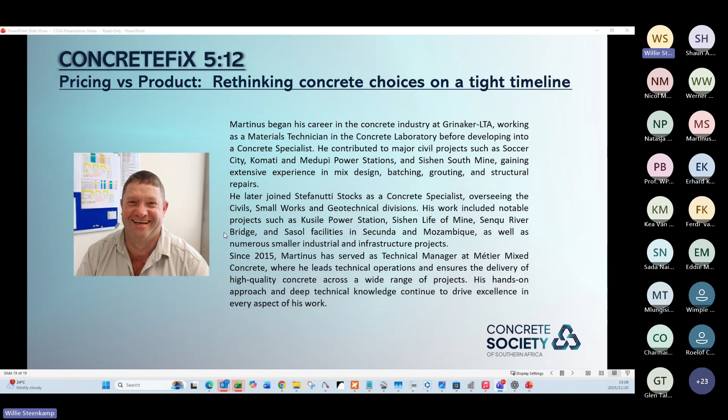Thank you very much. I'm trying to share here, so that is, yeah, okay, cool. Can everybody see that? I assume so, Natasha? Yes, I can see it on my side.

Okay, cool. So Natasha asked me to present on challenges we have in ready mix with customers or with projects, and I've thought about it hard. Where do you start to guide people in a direction without offending people? And I think the one common thing is everybody's in it for the money and we want quick turnaround. And pricing versus performance stood out as a topic that one can actually say quite a bit about, but it goes quicker than I thought.

So let's start here by saying nine out of ten times, if a project's being priced, the QS asks for pricing, and what you ask for is the cheapest because you want to win the job. Then six months to a year later, you start the project and everything goes well. After the first pour, you get a call from the project manager and he reckons, meneer, your concrete is substandard. Meneer, what do you mean? No, we can't strip our formwork. Yes, but you did ask for the cheapest concrete. The cheapest concrete is not necessarily the quickest concrete.

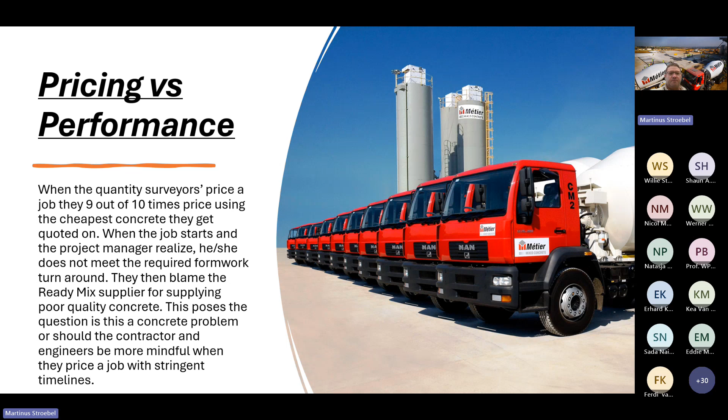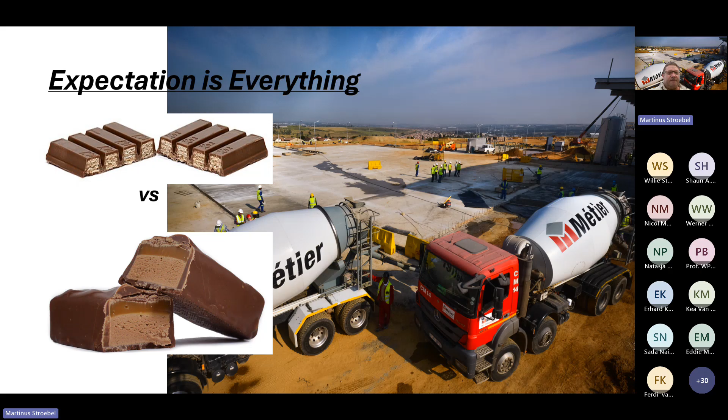And then I started running through this in my mind, and a practical application for the married people. You go out to the shops, your wife or husband asks for chocolate. You bring a specific chocolate, but the expectation was something else. They're both going to work, they're going to sit on their hips for some time, but it's both chocolate. And when you go into concrete, you ask for concrete, you're going to get concrete.

The thing with concrete is we only see the result seven days later. So then the whole argument starts. Is it bad quality? Is it good quality? Is the cement blend right? Is it not right? Yes, we priced it. That's what you asked for, contractor or customer. But we still guarantee the 28-day strength you asked for at tender stage. And like most other ready mix suppliers, everybody will stand by their product and guarantee their 28-day strength.

It's very rare that you get a request from a customer saying, listen, we need 60% of the characteristic strength to strip, this will be a quick turnaround project, and we need to turn around formwork because that's quite expensive, and we need to finish the project in six months, not 18 months like we planned initially. So your expectation is not clear. So what I'm saying is expectation is everything.

If you expect a fast setting concrete or concrete that gains strength quickly, it will be required for you to tell us as a ready mix supplier what you need. Then we can price accordingly. Otherwise, you're just going to get run-of-the-mill, I don't want to say cheap and nasty concrete, but a good quality concrete that is the most cost-effective concrete we can supply to win the job.

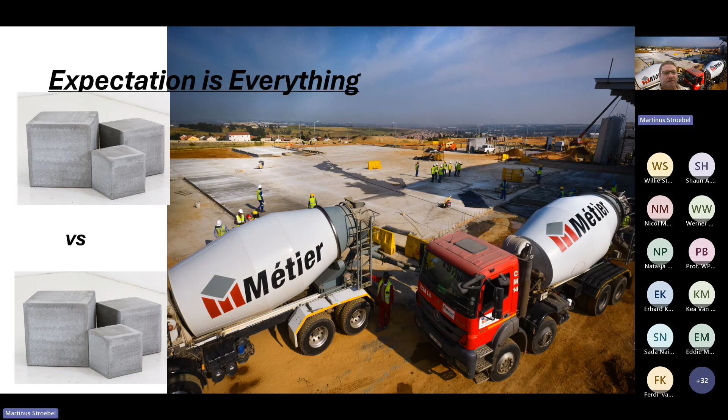When you then look at the cements that we are able to use, there are 27 families that we as a ready-mix supplier can make use of to supply concrete. And remember, every component in that cement or cement blend comes at a cost. It depends where in the country you are. If you're close to a slag source, slag might be cheaper, fly ash might be cheaper. If you're closer to a cement factory, that also plays a role in the transport.

So there are 27 types of cement that you can start off with to blend. And according to SANS 50197, there's a band. If we take the worst case scenarios, a CEM II or a CEM IV/B, you can blend up to 35% or more than that. I think it's up to 50% extender in a B mix, which then says there are around about 945 blends that any ready-mix guy or any producer can come up with. The problem with this is each of those blends will have its own strength gain characteristics, and that determines the rate that you can build at.

A CEM II/A, we can blend anything from 6 to 20%. That is typically the cement that we would get. And as a ready-mix supplier, you would extend further to produce the most cost-effective concrete on the market, which is technically sound. And with every percent of slag or fly ash or lime extender, you change the rate of gain, and it influences what is possible on site.

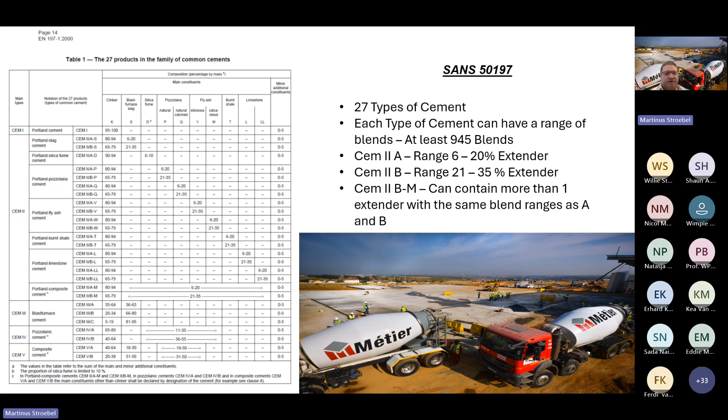The same with the Bs, you can go up to a 35% extender, and if you go into a B-M mix, you can complicate this even more because you can add more than one extender into that cement. And different extenders have different strength gain characteristics, and they react differently with different cements, all to do with the chemistry in the background. But bottom line is, if we as a ready-mix supplier know what the target and the expectation is, we can do our best to meet that expectation and ensure we have a happy customer and a project that is successful without any hiccups.

Different blends will achieve different strengths at different ages. In short, I've just tried to summarize this. If you do a 65-35 blend with fly ash, I'm not even touching on slag currently, you can range anything from 62 to 78% at 7 days. Now, if you as a contractor plan your life that you need 70% at 7 days, and you've priced for the cheapest concrete and you get 60%, you will not be happy with the ready-mix supplier.

Although there will be nothing wrong with the concrete, it will meet the strength, because none of the ready-mix suppliers are in the market to supply poor quality concrete, because the reputational damage is just far too great. Nobody's in it to kill people. We will design to meet strength. For a 70-30 blend, the same thing. The band is quite big, between 65 and 72% can generally be achieved at 7 days. And that is of your design strength, not necessarily your characteristic strength. So it's quite a handy tool to predict where you're going in future.

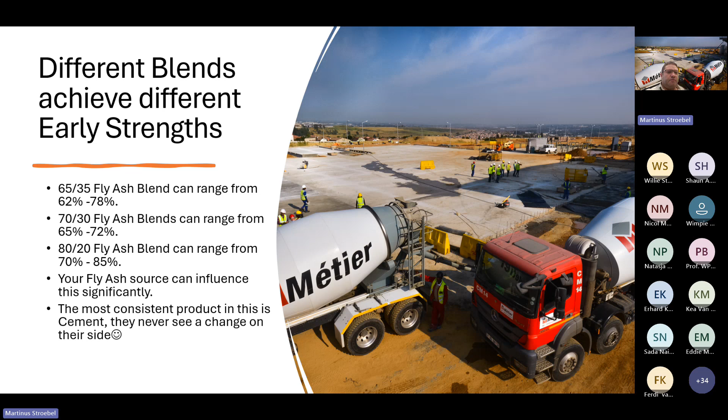So we did a field study, and this is courtesy of Giselle in Durban. We ran comparisons between a CEM 3A and a CEM 4 BM, which was blended at the same cement-water ratio, and I think the extension on this, if I remember correctly, was about 50-50 clinker versus extender. Both target strengths of 30 MPa. So all good. We're going to supply a 30 MPa concrete to the customer, and 7-day results come in.

The customer who got the CEM 3A is very unhappy because he cannot strip his formwork. He's not allowed to do so by the engineer. He phones us: very, very poor quality concrete, very unhappy, and you end up coring the structure, extra cost to the customer, extra cost to the ready-mix supplier, possible delay to the client. And yet if we go further, you'll see nothing wrong with the concrete. It is just the nature of the strength gain.

The customer who got the CEM 4, extremely happy. He achieves his 70% or 66%. He can strip his formwork. He almost achieves characteristic strength at 7 days. Now, this is good quality concrete. Customer is very happy, and you can carry on with life.

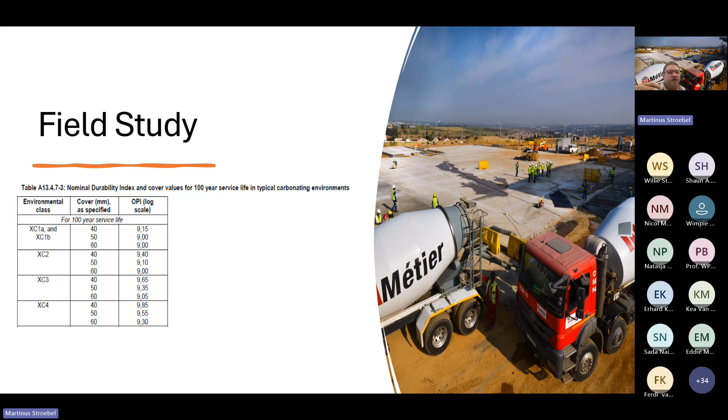Your expectation as a customer was not met initially because you could not strip your formwork. It's costing money. It's not what was planned on. And yet the concrete is of a good quality. So I think it's something to bear in mind that it's not always a bad quality concrete if it does not meet your early strength expectations.

So what we've obviously proven in this field study is that both the characteristic strengths were met at 28 days. Durability generally exceeds the expectation. Both concretes might not meet the expectation on site, as we would need to turn the formwork around. And I think this is a big thing for the contractors, that we need to build quickly. We don't have time to wait.

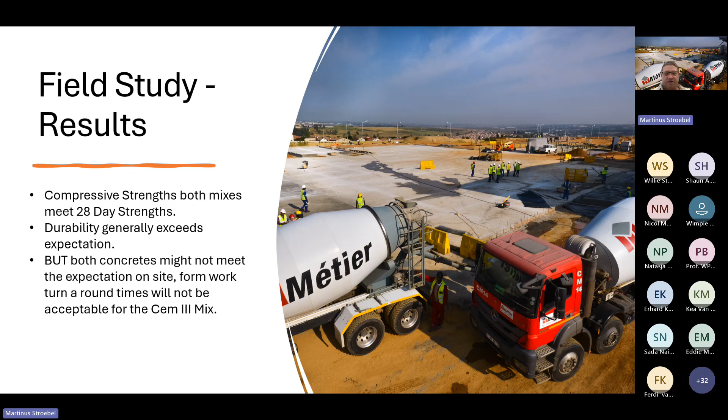So the big thing that influences this is the availability of fly ash. 18 months ago, Eskom didn't burn enough coal, and fly ash was a major issue. So in that case, up in Gauteng, we were fortunate to get our hands on some slag, and we could carry on with operations. But the slagment concretes, like you could see, did not meet early age strengths. But on many occasions, we found that we did not know as a supplier that we need to meet certain early strengths to strip.

Eskom's recovered, and 9 out of 10 times we now know what the customers want. It was particularly bad last year or the beginning of this year, especially in winter, when the slag did not meet the requirements. Currently, slagment's a problem again, because of the challenges Mittal themselves are facing. So it's a constant battle to get raw materials and compile mixes that meet the end user's requirement and meet the expectation and not disappoint. Yeah, so it's a constant challenge from our side to ensure that we deliver concrete that meets the expectation.

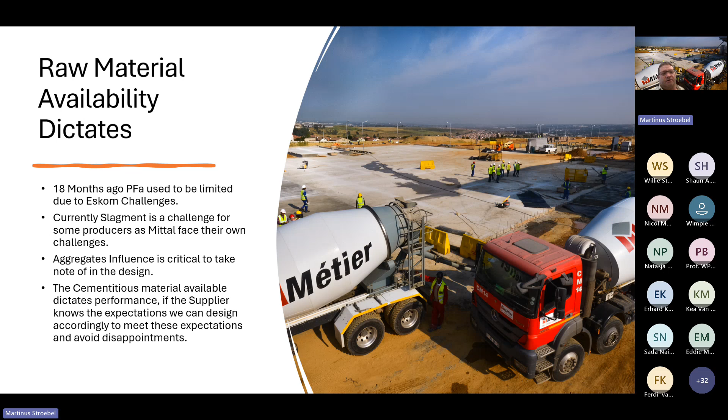Aggregates are also critical in this. There are definitely certain aggregates, especially around Gauteng and the Northern Cape, that benefit your early strength. So you can use slagment with the specific aggregates that will then ensure that you achieve your early strengths. So it's very critical that as a ready-mix supplier, we understand your requirement as a customer to design and use the correct materials to meet the expectations. Most important in all of this is the cementitious material available that dictates the performance. So if the supplier, which is us, ready-mix operators, knows exactly what is required on the project, we can, to our best, design to meet the requirement and avoid the disappointment.

So in conclusion, as a summary, I would say you as a customer must understand what you're trying to achieve before you start. And by doing that, we as a team can then know and design and have the same goal as a target to achieve. So it's a request from our side as ready-mix operators: share as much info as possible when you ask for concrete pricing. Drawing notes, project specifications, make it clear to the company's rep what is expected, so we can, to the best of our ability, avoid the disappointment of not meeting the expectations.

Inform the parties you tender to what the early strengths required are, what the durability requirements are, what the exposure conditions are. If we're doing floors, there's abrasion resistance that we have to take into account. There are abrasion aggregate types. You don't want to use dolomites. We can't have high polishing values, those sort of things. So make the expectation clear, and the ready-mix guy will most likely go out of his way to ensure that he has a happy customer.

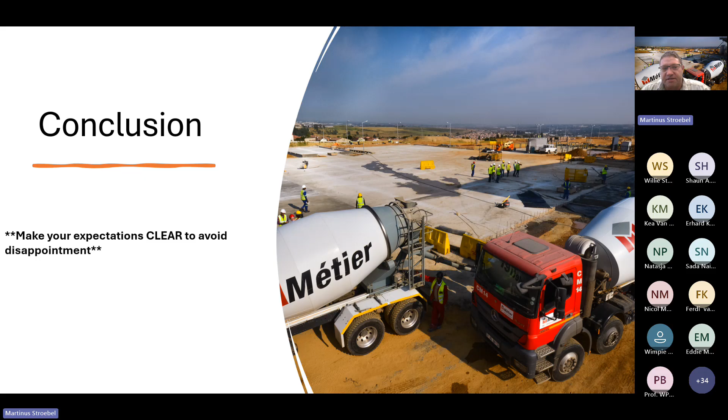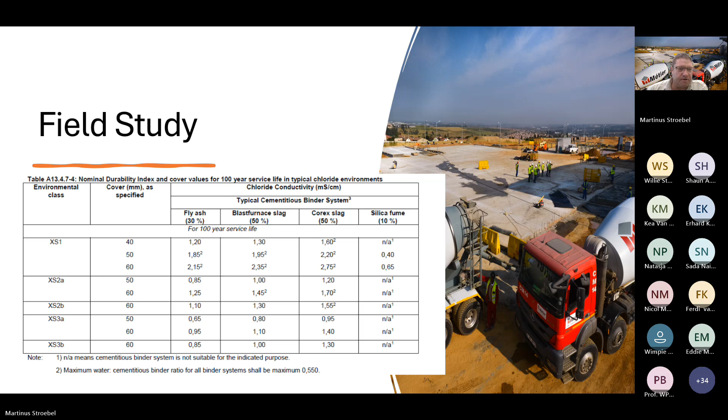I just want to go back, and I think I can show that on the one slide. If you are willing to wait up to 56 days, we can get away with a lower strength concrete to reduce it even further. So for instance, we could have used this 30 MPa concrete in a 40 MPa structure, and we would have lowered the carbon content significantly.

But then again, in our lives, everything is about speed, and I don't think many customers really want to wait the 56 days before they load a structure. They want to load as quick as possible. So you will have to compromise time, and time is money. You've got to take that into account. Thank you. Perfect.